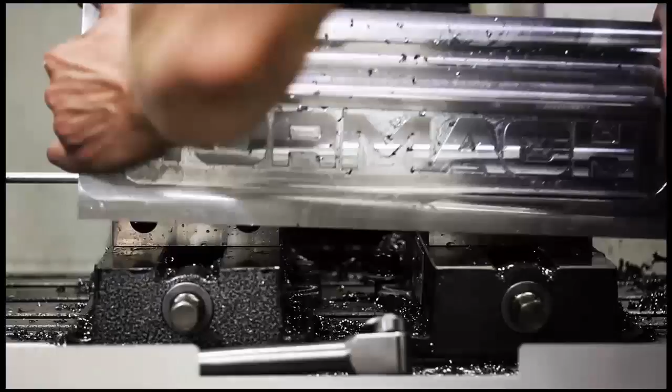Okay, now that we have scanned the carburetor part with the CNC scanner, and we have drawn the geometry in the ScanCAD, we are going to now do the toolpaths in SprutCam. So the first thing we're going to do is go to File and Import, and we're going to pick our gasket DXF. This is the DXF that I exported out of ScanCAD.

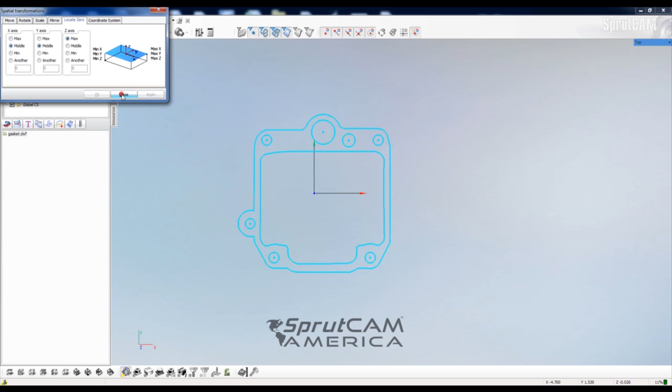Click OK, and you can see this is the geometry. And now we're going to click on Part. We're going to orient it, make sure that the work offset is in the center of the part. So we're going to click on Part and Gasket. And then I'm going to click on Transform, Locate 0, and close. It is already located in what is considered the 0 point of this box.

So now we have to draw a box around this part to use as our stock material. So I'm going to orient it in the top view. I'm going to go to 2D geometry. I'm going to turn on the grid system. And I'm going to create a line from here to here, and from here to there, and go right across to here, and then connect these two. And this will be our stock box.

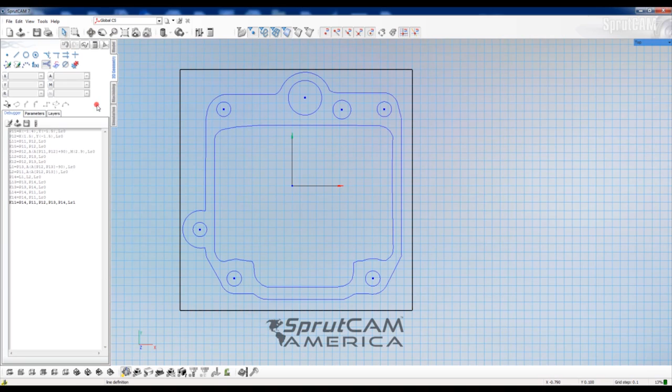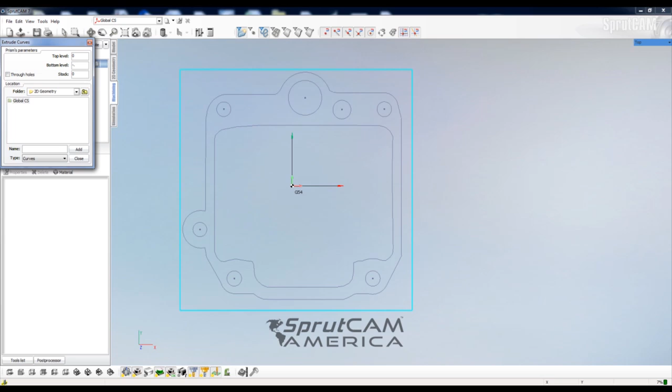I'm going to join these curves by clicking the Join by Elements icon. Join them into one solid. Now we'll go to the Machining tab, and we will create our workpiece. We're going to extrude this geometry from 0 to minus 0.45. Sorry, minus 0.045. Click Add. Now we have a 45 thousandths thick piece of material.

Okay, now we're going to use the 2D contouring function to create this. So we're going to go to Create, Finishing, 2D Contouring, and we will pick each one of these circles. And we're holding the control button down as we do this. And then we will double click on this inside contour to select it. And go over to our job assignment and click Curve. Now all these curves are available.

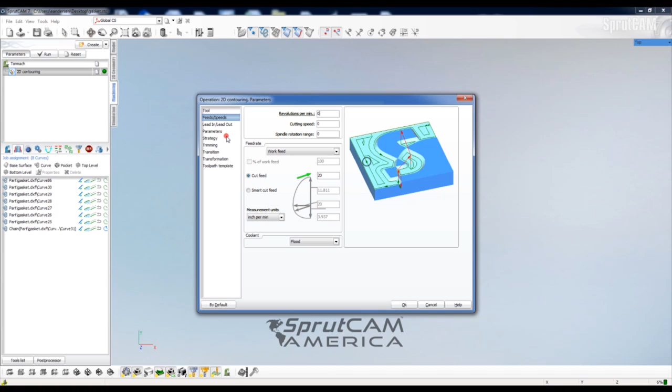I'm going to drag this one so that it starts on a straightaway. It's kind of good for drag knife cutters to start on straightaways if possible. And now I'm going to go into 2D contouring. I'm going to make my tool diameter 10 thousandths. We'll call this a drag knife. Feeds and speeds, 20 looks good. We don't have to worry about the spindle because we're not going to turn that on, but we can put 0 in there just to make sure. We're going to take it to a safe level of 0.15.

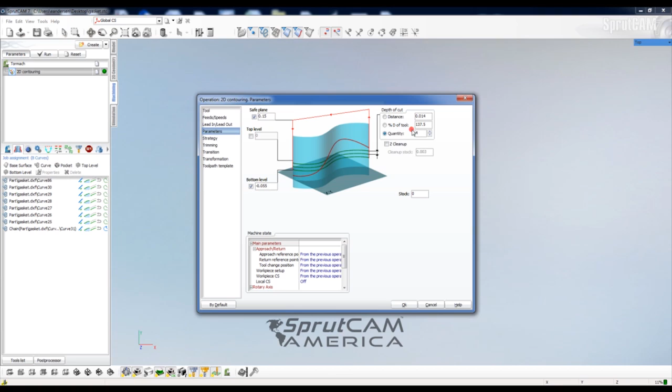Our parameters, we're going to take it to a bottom level of 55 thousandths. This material is about 45 thousandths thick. We're going to go a little deeper to make sure that we cut through it all. Taking it in 4 cuts looks pretty good, and we're going to turn on our helical machining so we make sure it goes down just a little bit at a time, cuts through it nice. We'll click OK, and then we'll click Run. And this looks pretty good at first glance.

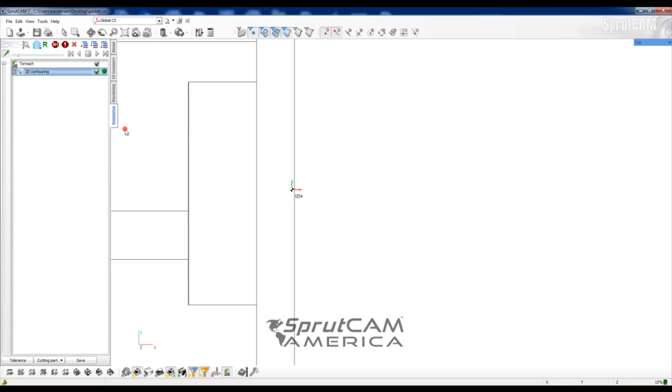Let's take a look at the simulation. There's the cutter. It's going to cut that circle, kind of go around the horn here, cutting out some circles. And it's doing the inside. And should, when it's done, cut one more circle in that bottom right-hand corner. That looks good. So now we're going to go back to our machining tab.

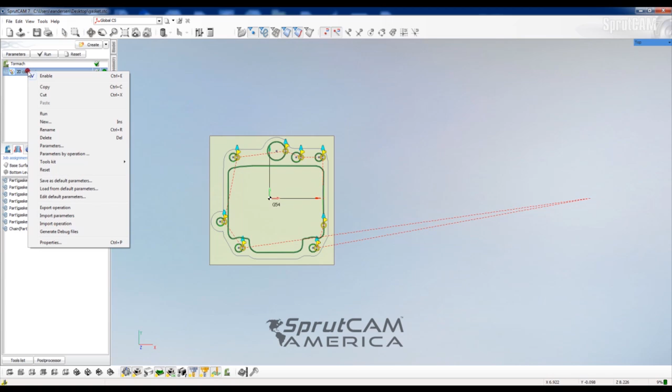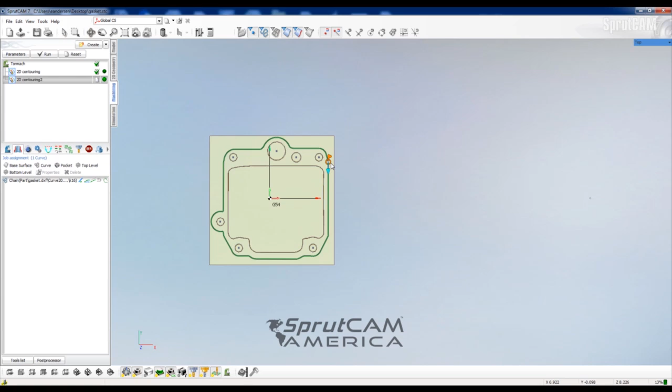We're going to right-click on 2D contouring, click copy, then right-click again on 2D contouring, and click paste. Now we have a 2D contouring 2. So we're going to click that. We're going to come here to our job assignment where we have all our curves right now, and we're going to clear them all out. We're going to go over here, double-click on the outside curve, and then click curve to add it. And then all the rest of the things that we've already set in our first 2D contouring operation should apply. And move this down just a little bit, click reset and run.

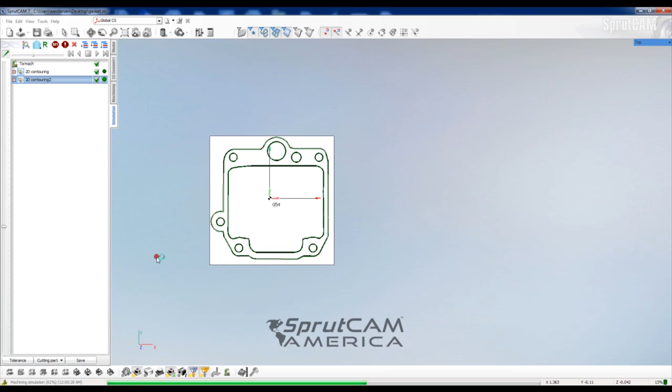Go over and click play in our simulation and make sure that this cuts out nice. That all looks very good. So now we're going to post this to a flash drive that I have just put into the computer. So we're going to go to our machining tab, click post processor. We're going to make sure our post processor is one of the more current ones.